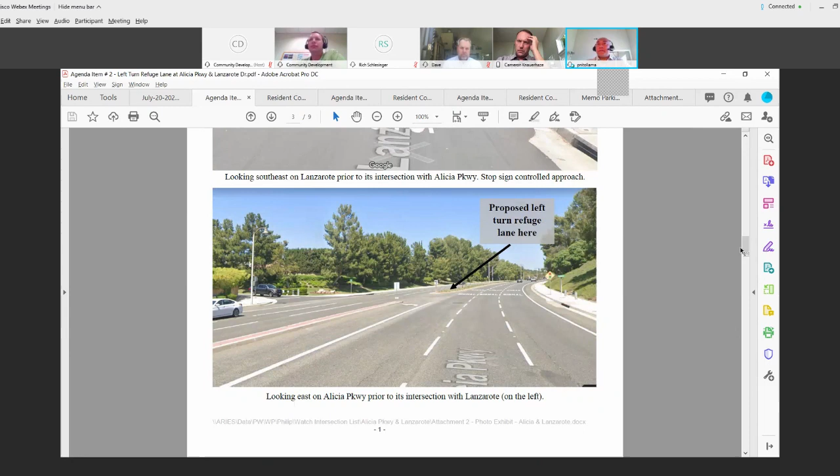And then this picture here is if you're traveling westbound on Alicia Parkway, you have Lanzarote to your right, and then the raised median is on your left where the proposed left turn refuge lane is supposed to be constructed. This picture is just a location of what's out there today. There is a raised curb median, some landscaping and some trees, and I believe there's a drain inlet at the nose with some signage.

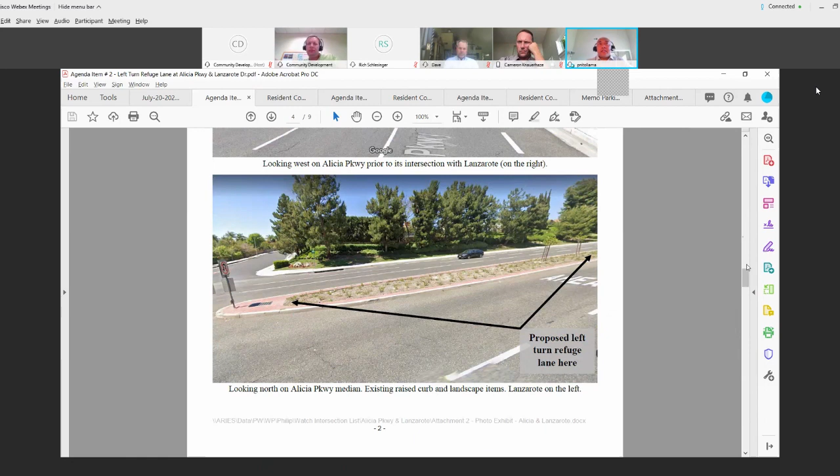This exhibit shows the intersection sight distance visibility based on our standard plan 315. You're supposed to be able to see 660 feet in each direction when exiting out of Lanzarote. There is a slight horizontal curve that's in favor of the sight distance, so you're on the outside of this curve, which increases your visibility.

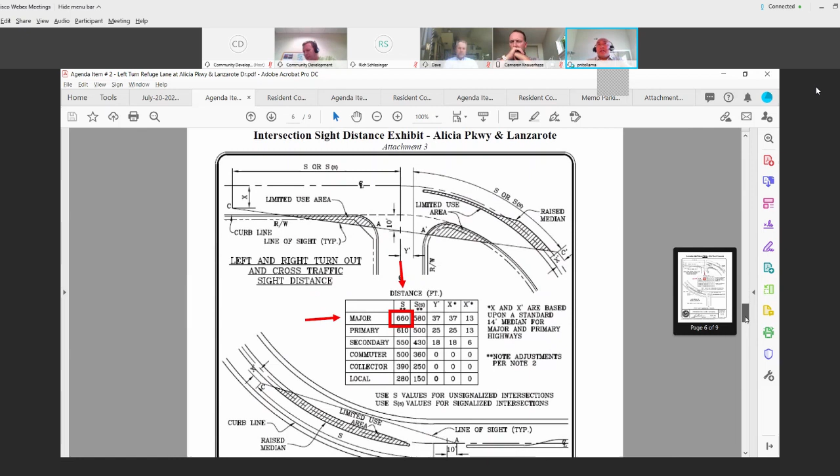And then this is our standard plan. Alicia Parkway is a major roadway and it's an unsignalized intersection, so that's how we came up with 660 feet.

And this is the original request that we received from the resident. I'm going to read this out loud.

Good afternoon, Mark. Here's a preliminary design sketch as to how to improve traffic flows across Alicia Parkway from Lanzarote to the eastbound lane of Alicia Parkway. You and I have discussed this possibility many times over the past few years, and I thought I am now going to do something about it.

We need action, and I speak on behalf of many Andalusian residents. The city opined in Brett Kennedy's recent letter that there is no significant reason to do anything. He obviously does not recognize the traffic problems getting across Alicia's westbound lanes. Mark, I urge you and respectfully ask you to get this work designed and done.

I am writing this and submitting my preliminary sketch to you and asking you to give this matter priority. When the swimming stadium needed to be renovated, no money nor effort was too much. However, when one looks at the overall impact of it, one asks who's actually benefits from that $11 million. Anyway, enough said. So please let's see some action very soon. Hope all is well with you. Sincerely, Jeff.

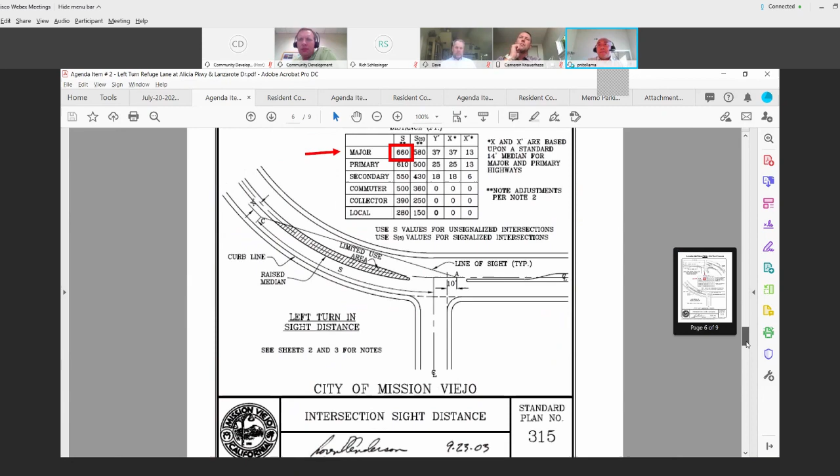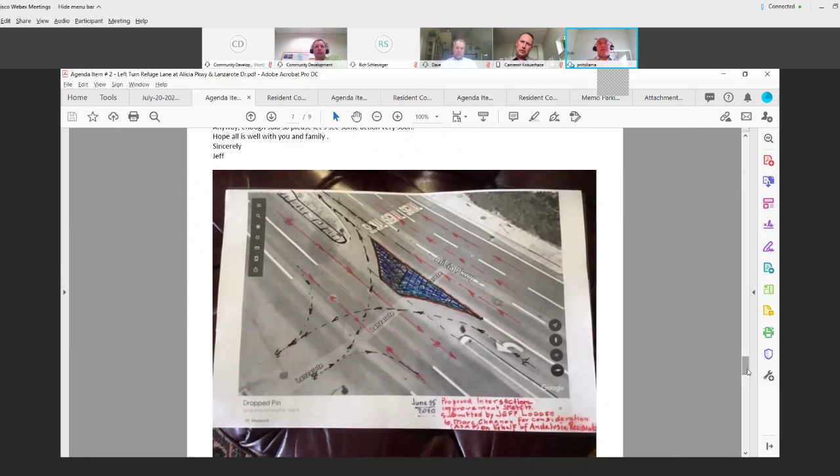Can you guys see this exhibit right here? Okay, I just want to make sure that this is very clear what's being asked. There's supposed to be an eastbound refuge lane, and then there's also a guiding island in the middle - a triangular raised island at the middle of the intersection.

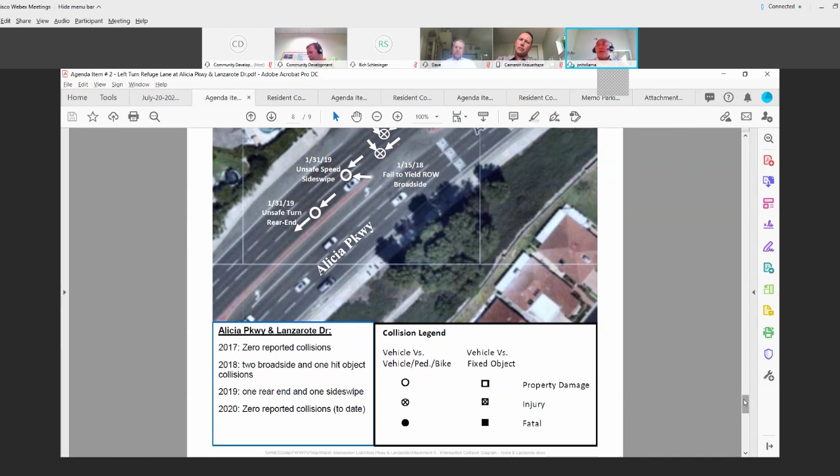We typically review collisions for 3 years, so 2017 is as far back as we review. But in 2016, there was a fatal collision at this intersection - another broadside. The cause for that one was based on driving under the influence, as the driver was under the influence. That's outside of the 2017 3-year mark, but I want to make a note of that.

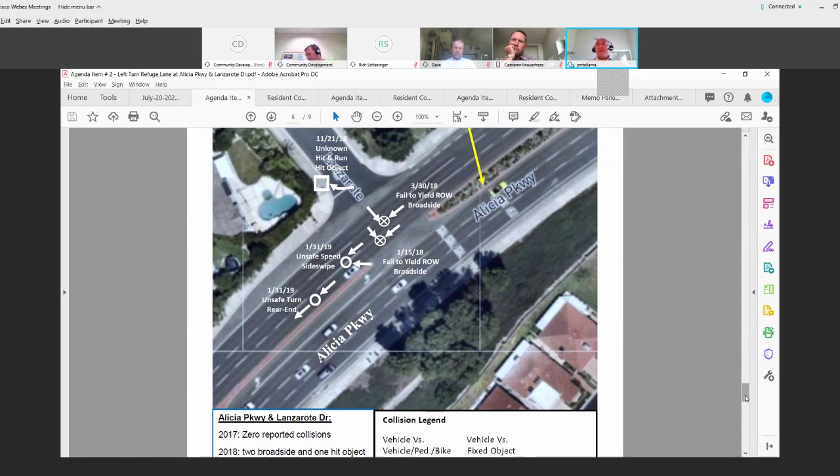Option 1 is to keep the intersection as it is. Option 2 is spot police enforcement and temporary speed radar trailer placement.

Option 5 is to construct a no left turn signage and striping and eliminate the left turn on Lanzarote. That would make the drivers make a right turn instead, and then they would have to make a U-turn at the next signal, which is Calle Azarin.

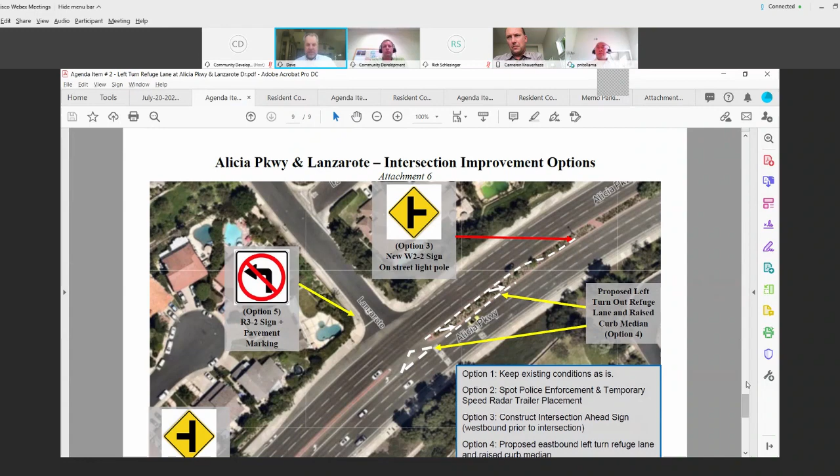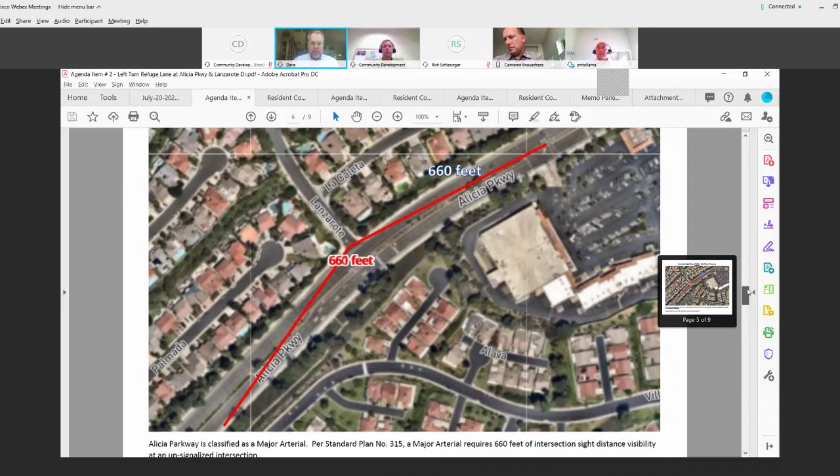All right, I have the perfect solution. Okay, if you can go back a couple pictures, because there's one that's just so perfect. It tells you how crazy this intersection is. I'm very familiar with this intersection. Keep going, one more, I think. It really gives you a feel. One more picture. All right, I guess that's good. That's a good one right there.

So that's Lanzarote, people are coming out. The red car is about to try and get across to go eastbound on Alicia, I suppose, where that is. I've done that, I've been right there, and I know all of you have too. You've got 3 lanes of traffic and a bike lane coming at you, and you have to time it so you don't get hit by anybody coming down eastbound Alicia. It's not safe. I'm glad you mentioned the fatality that was there not long ago, a couple of years back.

And it seems like all the accidents—this is where you guys decide this part—but it doesn't seem like that refuge lane would solve the problem. Almost all the accidents have been T-boned, from someone coming down here, from a guy trying to get across over to that. So I don't see how having that turnout lane, or whatever we call it, the refuge lane, is going to solve the accident. The accidents have happened before they ever get over to that. So it doesn't seem like that's the solution.

Now go back, can you go back to the last one you just had? Before I ask you to go back all the way to the front.

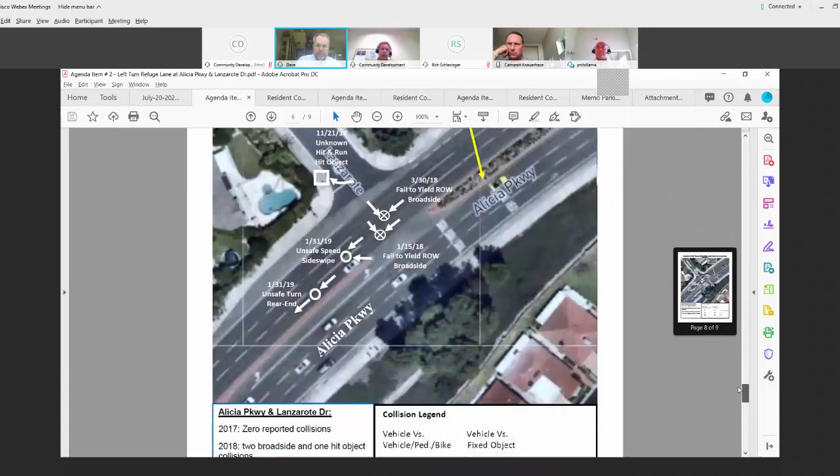Oh, that one there too, with that whole cutout thing. You can see it here too, the little white triangle or whatever. It seems like that might even be dangerous for traffic going eastbound on Alicia, and you've got that cement raised area there, I think that's raised. I don't know what that turnout lane is composed of, but it seems like that may not be the best idea. But here's your solution, and you guys just got to figure out how to do it.

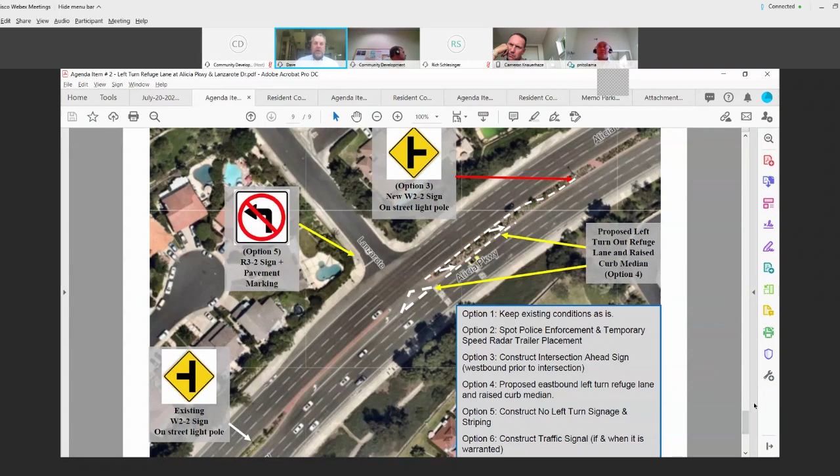I've seen them, they're like a yellow traffic light. It's not a traffic light, but it's just a yellow flashing. It just sends a message, hey, look out here, maybe slow down a little bit, something's coming up. Where there's no traffic, you don't have to stop. It doesn't screw up the synchronization, but it just allows the residents to know that this is something you should keep an eye out for.

In the event that you cannot do that, I think the traffic light is the best. It seems like this place would really warrant a traffic light. However, if it doesn't have all the criteria that allows us to have the traffic light, and you think this cutout refuge lane would work, then I would support that. Thank you.

Okay, thank you for your comments, Commissioner Leckness. I think you're referring to a beacon, the flashing beacon.

That's just a light that's constantly flashing. We do have a couple of those in the city. There's one on Trabuco, just prior to Modesto, and then we also have one on El Toro, just before Glen Ranch Road. The flashing beacons, that's what they're called, are placed there because they warn the driver that you may have to stop, there's a signal ahead. That's what the flashing beacon informs the driver. For this particular intersection, it is unsignalized, and they wouldn't be stopping because they don't have a traffic control. So I'm not sure if that's an applicable solution for this intersection.

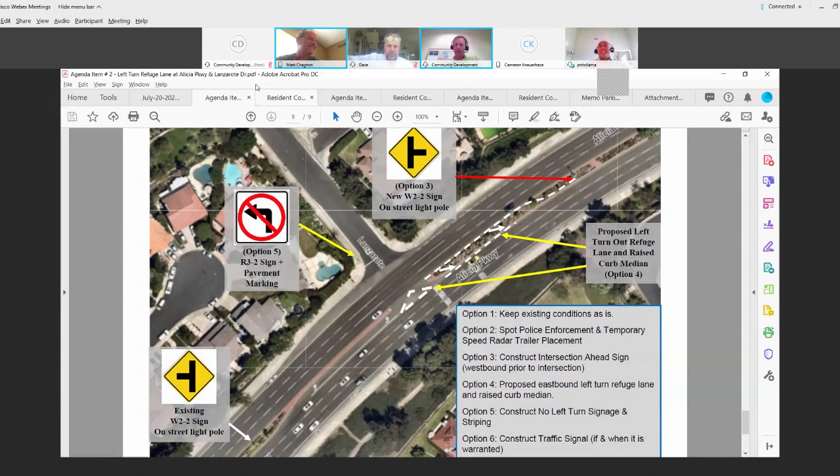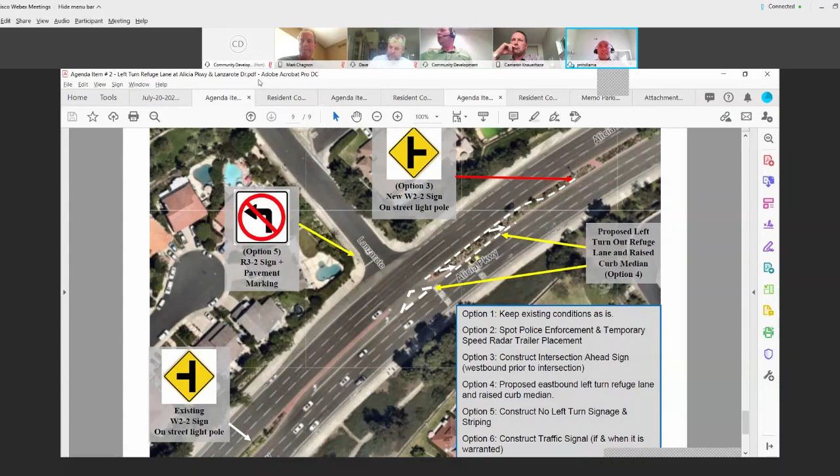All right, I think it's my turn to share now. Oh, this is our stop signs on Country Club Drive. Let's see here, I need to share my screen.

This item came to us at the request of one of our residents. This is a request for stop signs on Country Club Drive at Bodega Lane. This intersection is located off of Country Club Drive, just south of Oso Parkway. You can see I have it marked with the red dashed circle to indicate the intersection we're talking about. This intersection has an existing one-way stop on Bodega Lane exiting the Mission Ridge neighborhood. The request would be to add 2 additional stop signs and the associated pavement markings that would go with them.

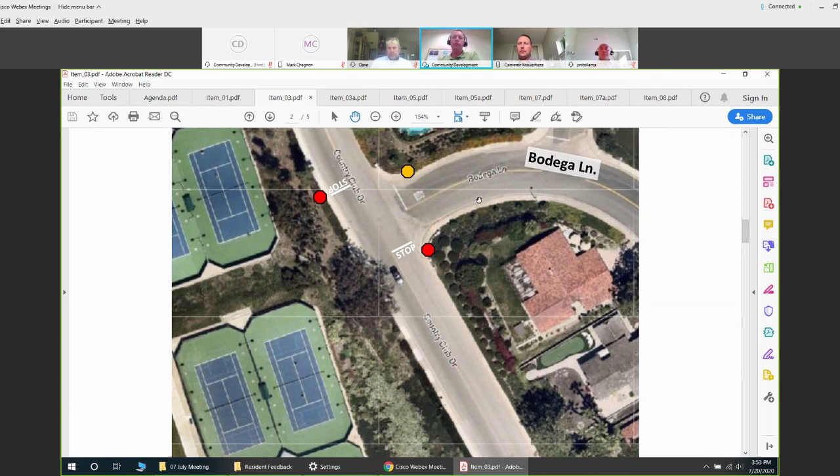We did receive one comment from the original requester that will go into further detail for the reasons for the request. So I'll just move ahead with our report on the intersection right now.

So we looked at the all-way stop sign warrants that are part of the California Manual on Uniform Traffic Control Devices, which has all the criteria we look for before putting out a stop sign. The first criterion, A, is we can put in an all-way stop when a traffic signal has been justified, usually as an interim measure between justifying the traffic signal and when it would be constructed. There are no plans to construct any traffic signals here, so that warrant is not met.

The second one, Warrant B, is when there are 5 or more left turn, right angle, or broadside collisions within a 12-month period. We looked back at the last 3 years of data, 2017, 2018, and 2019, and found there were no broadside type collisions at this intersection. Therefore, that warrant is not met.

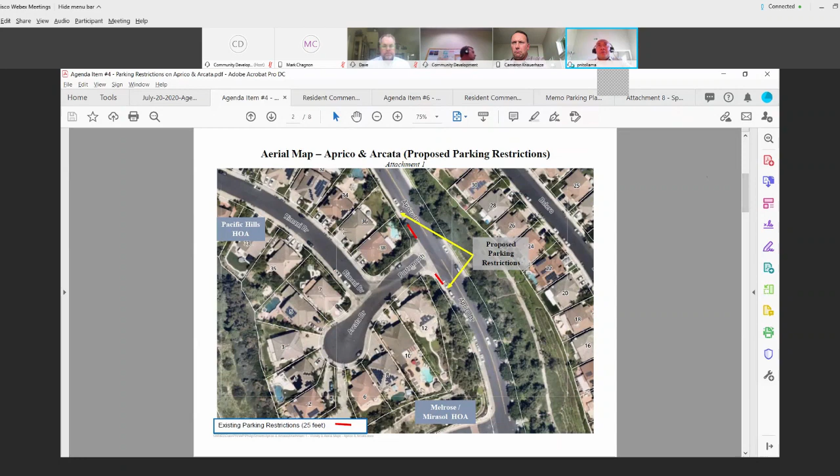What the resident is asking for is to go above the 25 feet existing restrictions so that they could see better, with the sight distance when they're exiting out of Arcata Drive. On this exhibit, we do have Pacific Hills HOA when you enter Arcata Drive, and then to the south, when you get further down Aprico Drive, there's Barletta, which leads to the Melrose and Mirasol HOA.

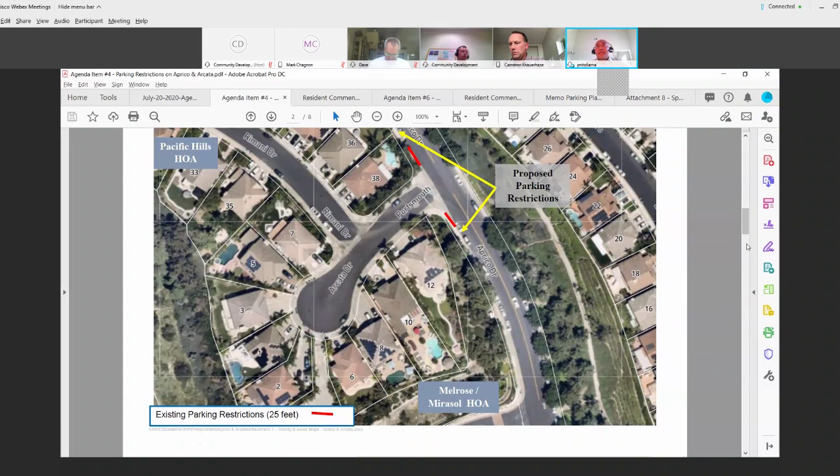This exhibit here is when you're traveling south on Aprico. As you can see, Arcata is on your right. This is if you're sitting, trying to make, to go out of Arcata. You could see the parking restriction on the right.

Today, there's a 25 foot parking restriction, with a sign here in the middle. What they're asking for is a greater parking restriction so that they could see better. Right now, there's not a car there, so the visibility is pretty good, but when there are vehicles there, they indicate that they're unable to see further down the street.

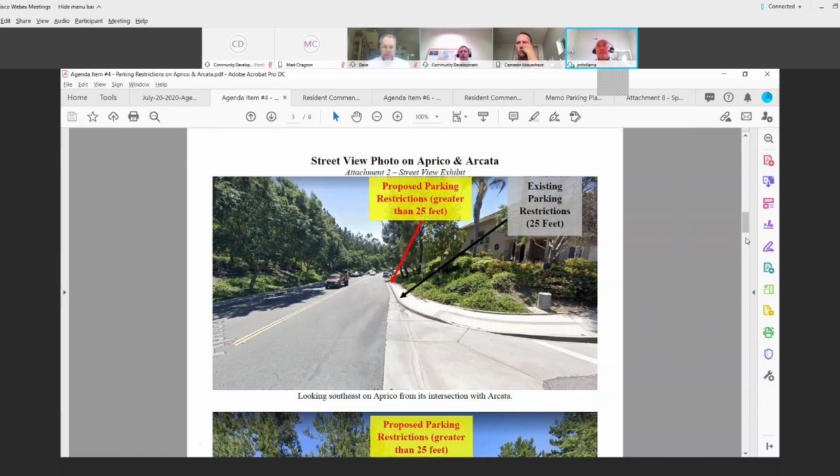And this street view photo is when you're looking in the opposite direction. Again, there's an existing parking restriction of 25 feet.

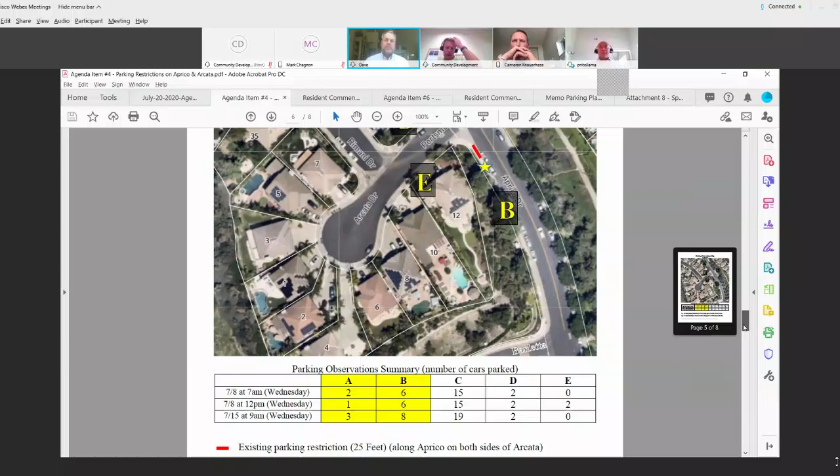I don't have a question, but I get the sense that the applicant just doesn't want parking on Aprico, and it's not a real safety issue. I know that area, I go down that street often, and there are cars parked along both sides, but it's needed because of everybody. Right now, especially like the one person who wrote the email said, with people being at home in the last few months, it probably is a little more crowded there because people are at home and they really can't go to work, or they are working from home. I thought that was a great point that she mentioned there. But

My feeling is, I don't know if this is a staff recommendation or what, but I feel it should be left as it is, and they just be careful coming out of there. It's a perfect street too, it's not a big traveled street. It's perfect for somebody to park cars on both sides. It is the ideal street to park cars on. There's no homes in front of anybody's home. It's just the perfect spot, I think, to have overflow parking. Thank you. All right, thanks.

I would only add to that. I agree with Dave. There's a real overtone of this being a community policing problem. I would highly recommend that your reporting party call the sheriff's department, have those vehicles that are marked, get them marked if they're there past 72 hours, have extra patrol checks. But the safety aspect wasn't really articulated. What was articulated is that this was a community policing problem with the commercial vehicles, the RVs, drug activity, littering, and everything else. So I would say leave it the way it is, but blow up the phone over the sheriff's department and get some extra patrol checks over there and see if that helps at all. That's all I have.

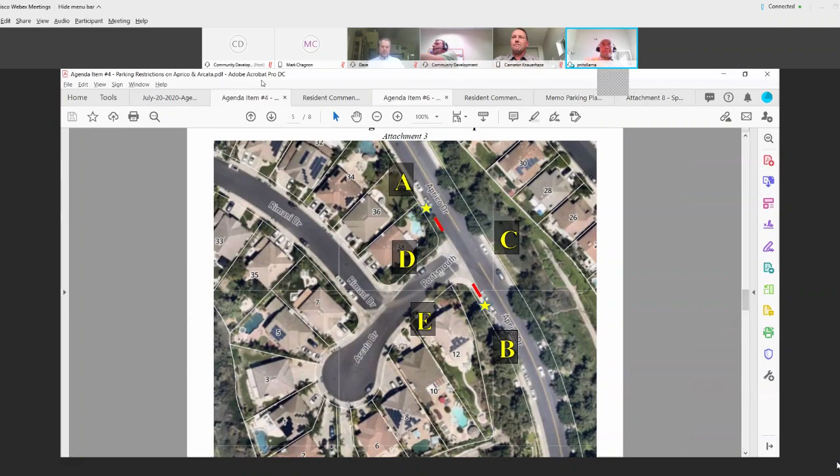Hey guys, so stop me if you've heard this before because we're going to be back on Bodega Lane here. All right, so let's get back on this and then.

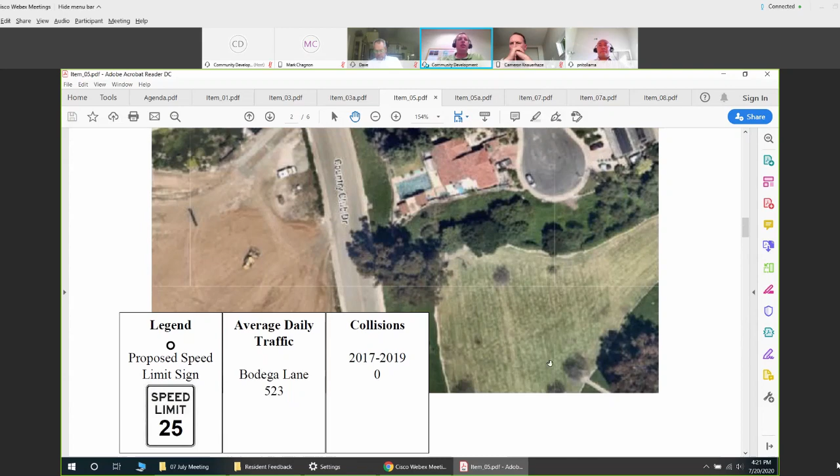So we looked at the collision history out here again, as we do whenever we have a traffic committee item on a street. From 2017 to 2019, there were no reported collisions on the street. Also, just for reference, I did look up the average daily traffic on Bodega Lane, that was some information we had collected for the stop sign item. On an average day, we have about 523 vehicles on Bodega Lane. Also, there's the legend showing what the requested speed limit sign would look like.

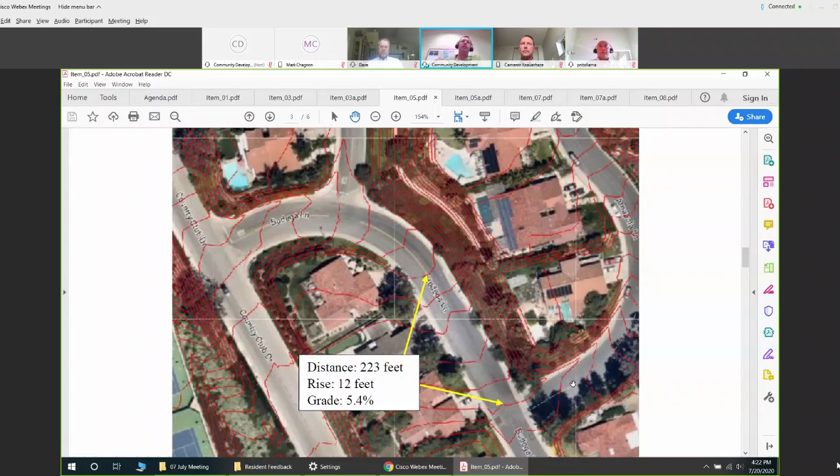One of the items of concern was the grade or steepness of the street as it descends down towards Country Club Drive. It's rated at about a 5.4% grade, so it's getting a little bit up there in how steep it is. As we talk about speed humps in the traffic committee so often, 5% is the cutoff above which we can't consider speed humps on the street. So that's just a reference for how steep the street is.

The California Vehicle Code is going to play a role in our decision making today, because typically with residential streets we have what's called a prima facie speed limit, where the street is considered a residence district, and by default the speed limit is 25 miles an hour. That's what this section, 22352, basically says: in a residence district, the speed limit shall be 25 miles an hour.

Below that, I have section 515 which defines what a residence district is. It looks for a roadway that's a quarter mile in length and has 13 or more dwelling units on one side of the street, or if it's double loaded, 16 or more dwelling units. So the length of Bodega Lane — here's our data.

It's about 600 feet long, which is short of the requirement in the California Vehicle Code. Also, for the number of homes, I was conservative and only looked at the 13 required for a single loaded street, since for the most part Bodega Lane is a single loaded street. We would need 13 homes, and there are only 7 total on Bodega Lane.

So that doesn't mean we can't do a speed limit sign. It means that just putting up a 25 mile an hour speed limit sign doesn't make it enforceable. What we'd have to do is include Bodega Lane in our next speed survey, coming up in 2022, and conduct a speed survey to justify a posted speed limit on that roadway to make it enforceable.

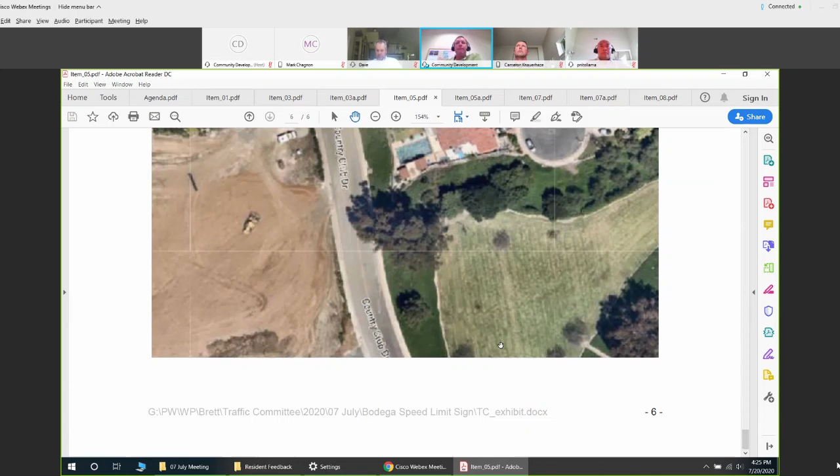And so that concludes my report on the request for speed limit signs on Bodega Lane. Do we have any questions from the commissioners, or shall I move on to our resident comment?

All right, so our comment is — oh wait, you know what, I have an exhibit for this. Here we go.

So the need for posting a speed limit sign when entering Bodega Lane is based on my observation of motorists driving at excessive speed in this residential area. The potential for vehicular accident and injury, especially for children, is present. Your action on this matter will help address or minimize this risk. This is from Donna Villanueva, who is the originator of the request.

So, at that, I can open it up to commissioner comments.

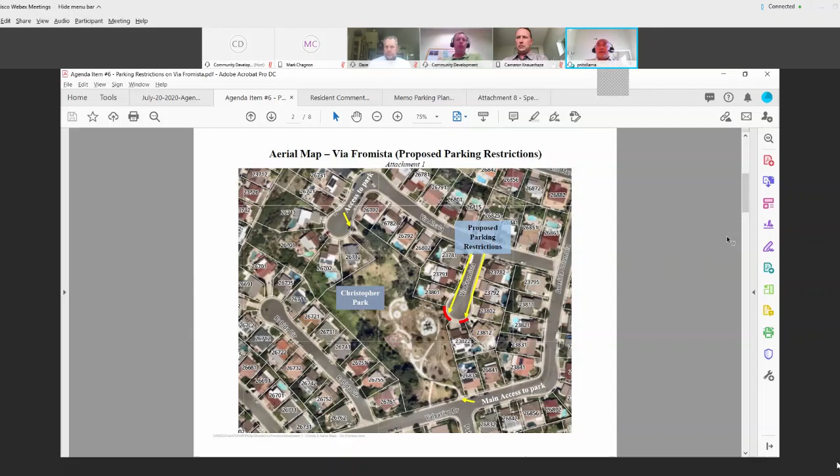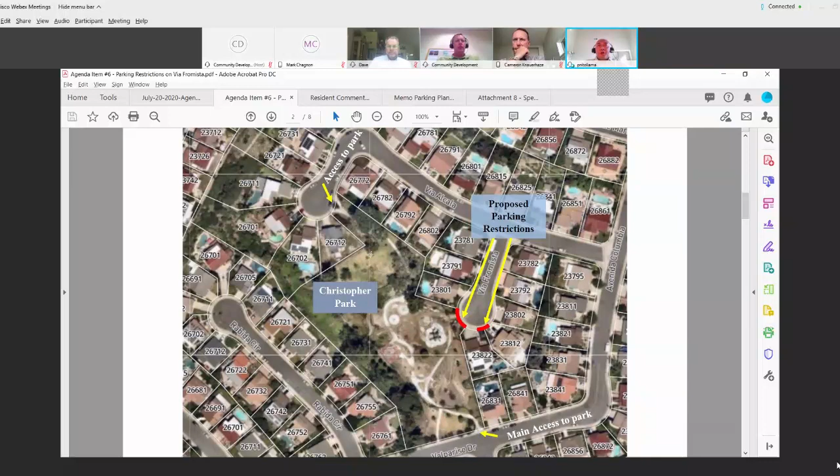We don't have any traffic volumes for this street, and there were also zero reported collisions in the past 3 years. So this is—let me try to make this bigger. Okay, there we go. So this is our aerial exhibit. This is Christopher Park, and we recently made some renovations on this park.

This park has 3 access points. One is on the top left via Alcala, and then there's another access point here on Via Fromista. On this cul-de-sac is where the proposed parking restrictions are being requested. There's 2 locations for parking restrictions. And then at the bottom of the exhibit, I don't know if you guys could see that, but there's also another access point to the park off of Valparaiso Drive.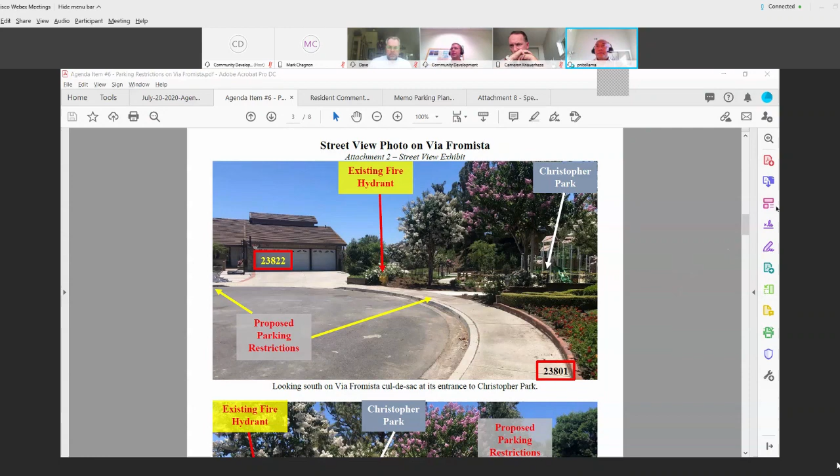Traditionally, the city has moved away from painting red curbs due to maintenance issues. We have been utilizing signage instead of red curb, so I just want to point that out very clearly. And this is another view of the area, just from the opposite end of the cul-de-sac. Again, there's a fire hydrant. The parking restriction would go right here, right in front of the entrance to the park. It is enforceable today because of the fire hydrant, but they do want red curb or signage or both.

And then this is a picture when I'm actually inside the park and I'm looking out. There's a fire hydrant right here. The resident that's asking for the restrictions is just to the right of the fire hydrant. And then just past the resident's driveway, there's a white car parked there. That white car is also the second area where they're asking for a parking restriction. All right, and then this is a photo that I took on June 9th—I was there in the morning.

This photo came from the resident. They said there was a construction vehicle parked right in front of the fire hydrant. This is actually the landscaper doing construction for the park - you can see the landscape and trees are different. So this is a city hired vehicle from when they were under construction. You can see the green fence is still up, and they have the ditch digger there.

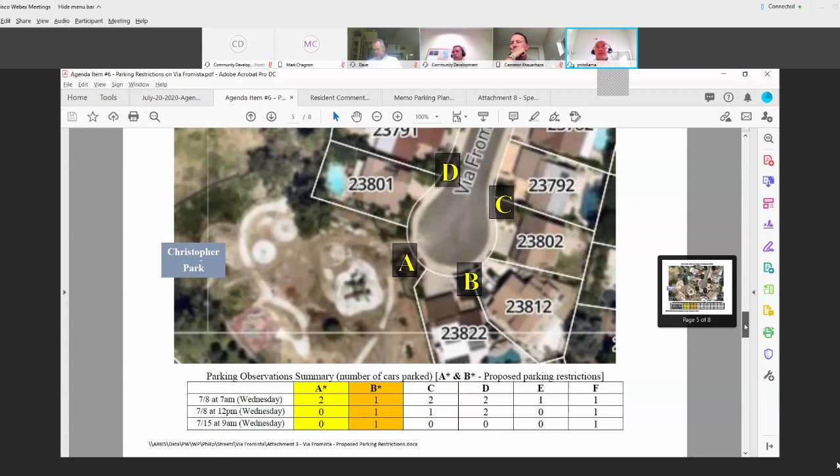Sections C, D, E, and F had a range of 0 to 2 cars at different times of the day on 2 different dates of the week. And this is the original letter we received from the resident at 23822, which was sent to our Public Works Department.

Good morning, Jerry. Thank you for taking the time to discuss the Christopher Park renovations with me last week. It is truly appreciated. Regarding the parking situation in Via Fromista, I believe that the Via Fromista entry to the park will be seen as and used as the main entrance to the park, and that this is going to affect our use of our own personal property and will negatively impact the quiet cul-de-sac experience we bought this house for. The use of the Via Fromista entrance as the main entrance to the park is evidenced by the construction crews on a daily basis.

For the same reason the construction crews are using Via Fromista each day as their main entrance, so too will park users, as the entrance is now the closest to the play equipment as well as the new picnic equipment. I just cannot see someone parking anywhere else, especially if they want to bring picnic supplies with them. At a minimum, we would like to ask the curbs in front of the fire hydrant to be painted red to deter people from parking here. Even in the old state of the park, parking in front of the hydrant has been a constant issue.

If the small curb to the left of our property could as well be painted red, that would be ideal. We often have to avoid cars hanging out of our driveway as park visitors try to use this small curb for parking. Both of these issues will be more frequent with the park equipment and picnic facilities now oriented so close to the Via Fromista entrance. I have attached a picture of the hydrant area discussed above. Additionally, I have attached 2 pictures showing how much dirt and debris is left each day by the crews at the point they enter the park. The pipes laid down to allow water to pass the trucks up the curb are once again filled with sand and rocks and other debris. Thank you for your assistance in addressing these questions. John Human.

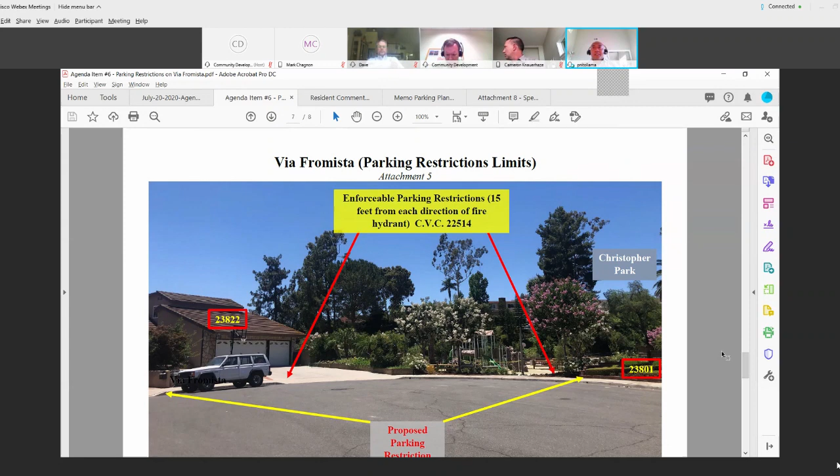Okay, so this is a picture when I'm standing in the middle of the cul-de-sac. This is the resident's original request at 23822, and this is the fire hydrant right at the middle of the picture.

I did show here that it is enforceable by our vehicle code that you cannot park in front of a fire hydrant within 15 feet in each direction. So here are those 15 feet limits. They are asking for parking restrictions for the entire curb here, and also on a curb to the left of their house where this white van or SUV is parked. This white SUV was there at all 3 times of my parking observations, so I just want to make a note of that.

And then this is my last exhibit. We have traditionally converted to no parking anytime signs in lieu of painting red curb due to maintenance issues. So I did show where the signs would be placed if we did approve it, or we could do the red curb paint, or we could do both.

And then this portion right here between the two houses is also part of the request to have parking restriction signs on both sides, or a red curb to indicate that no parking availability there. There's no fire hydrant here, and it's outside of the limits of the fire hydrant.

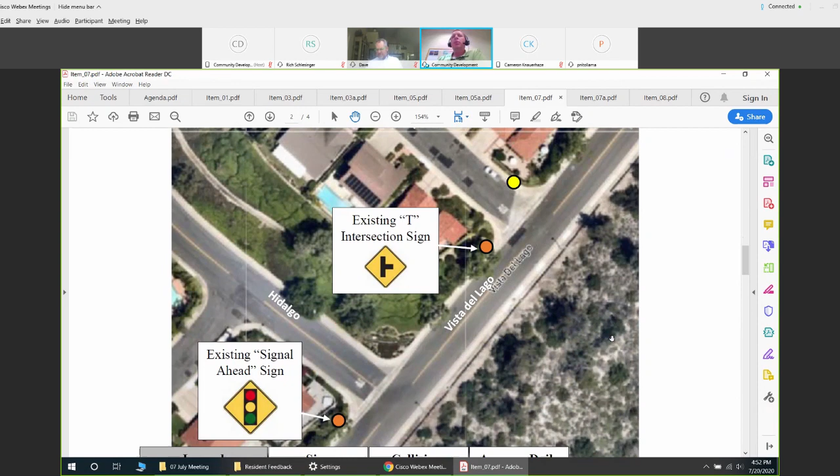Here's the exhibit showing the yellow dot where the requested no outlet sign would go, with a few other signs noted by orange dots. The first is an existing T intersection sign posted in advance of Hidalgo. Further down the hill, there's an existing signal ahead sign warning motorists of the traffic signal at Los Alisos Boulevard. Here's our legend showing the proposed no outlet sign and what it looks like.

At this intersection, for the last 3 years, from 2017 to 2019, we've had zero traffic collisions. Also, the average daily traffic of Vista del Lago is about 5,200 vehicles a day.

Here we have a couple of photos showing the intersection. There's the entrance to Abrazo from Vista del Lago, looking east, and then the same intersection from the west approach. Then this is on Abrazo looking out towards Vista del Lago, and this photo is looking into Abrazo from Vista del Lago.

I have one resident comment on this from the original requester. Let's see here. He says he'd like to submit the picture below for review: the through street sign is posted at the entrance of Abrazo, where I live, and not at Hidalgo, which it is intended for, and that's the root cause of confusion for drivers entering our street and speeding off once they realize it's not Hidalgo. The picture also shows a right turn arrow on Hidalgo Street, where the through street symbol sign should be moved to. In addition, our court needs a sign posted that it is not a through street.

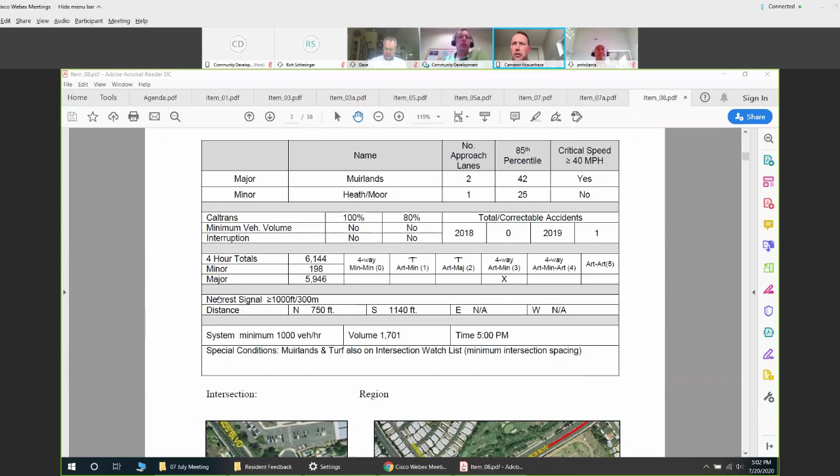You had a couple intersections with footnotes. What do those footnotes connect to? I think it was Poe and... there's one. Yeah, Alicia and Poe. There's a footnote.

The indications for the footnotes were left over from last year. It was because of the way the data was collected at those intersections—there was a little bit of an irregularity because they only collected data on one side of a 4-way intersection, so we had to estimate our traffic volumes based on having one side of the data versus both. But that was corrected in our data collection this year, so that footnote was no longer necessary.

Copy that, that's all I got. Okay, Commissioner Leckness, if there are no questions, then I will mark this as receive and file. Yeah, receive and file. Thank you.

On that, I can open it up for our updates. It sounds like Philip has some items to discuss with us, and then I have a few other little footnote items, and of course, if you guys have any other questions for us, feel free to ask. But I will turn it over to Philip to kick us off.

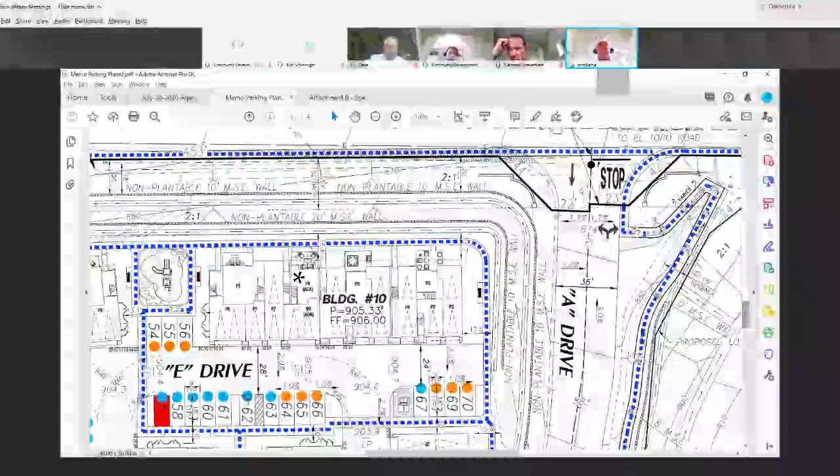So I'm going to now show the site plan. Let's see. All right, let me zoom out a little bit.

Okay, are you guys able to see the entire site plan? So on this site plan, the red parking spaces are the new spaces that were added. There's a total of 12 of them, and these are all guest parking spaces highlighted with a blue dot. This is the changes compared to last Monday's meeting.

We did circulate this plan to our staff internally. I know there were a couple of comments already. One was from our public services department. They indicated that parking space 21, next to the pool, they were looking to see if it would be better placed on the opposite side of the pool area, if it could fit.

And then our community development department indicated that parking space 45 in the middle, shows a row of about 15 parking spaces total. They think they need a landscape finger somewhere in there to break up that number of spaces. Our city code also says there's supposed to be a landscape finger, one for every 8 parking spaces. So that was the only comments that I saw.

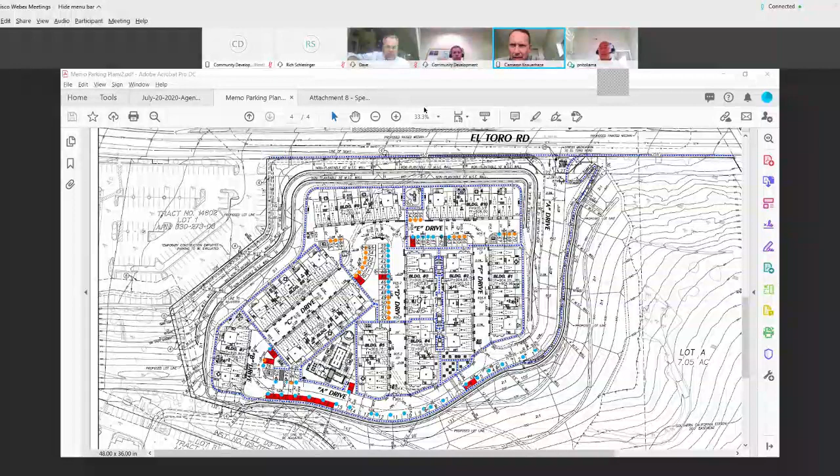And then just scroll down a little bit. There you go. Okay, so your staff was saying space number 21, they wanted to see it on the other side of the rec center. Did they give any rationale about that?

Did it have anything to do with it being butted up against that house? Yes, that's exactly the comment, was to move the parking space away from this home, maybe even add it next to 21 or 22 as another parking space if possible. They didn't want a parking space so close to the home, since this is the front portion of the home, just one parking space hanging out by itself.

I would agree with that. It's really close, and people coming and going and slamming car doors might be a little intrusive. If it can be fit over by 22, that would be an option, and if not, I would say eliminate it. Those are my only recommendations, the parking finger situation and trying to move spot 21 closer to 22.

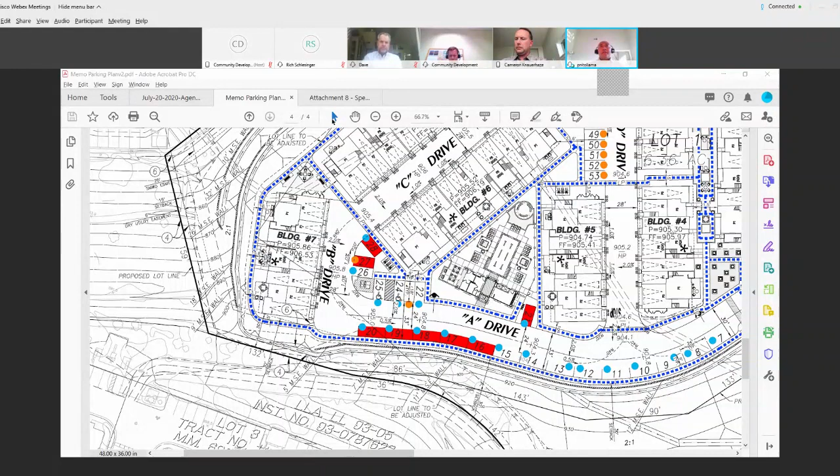I'll go ahead and move forward to our second update. This is just a follow-up that I wanted to show you guys what we've done so far. Back in January of this year, we went to the Planning Commission to approve some traffic calming on Via Fabricante and Obrero Drive. I don't know if you guys recall that. There was some angled parking installed last year and some pavement striping modifications. And then we went back to the Planning Commission for traffic calming reasons and an update.

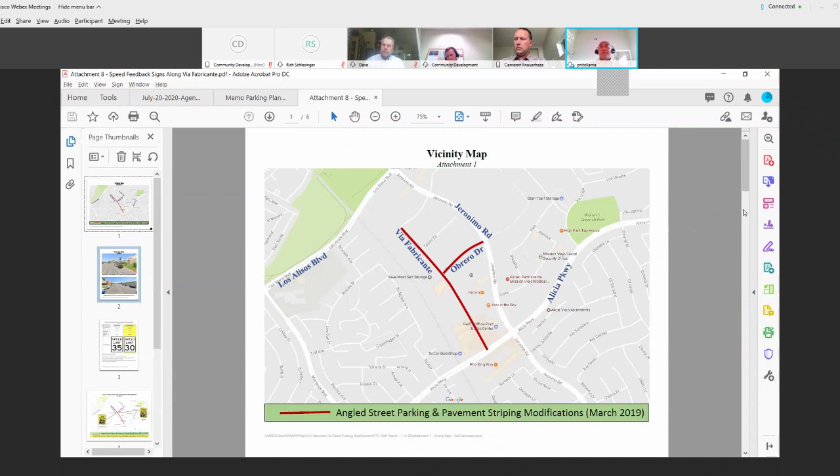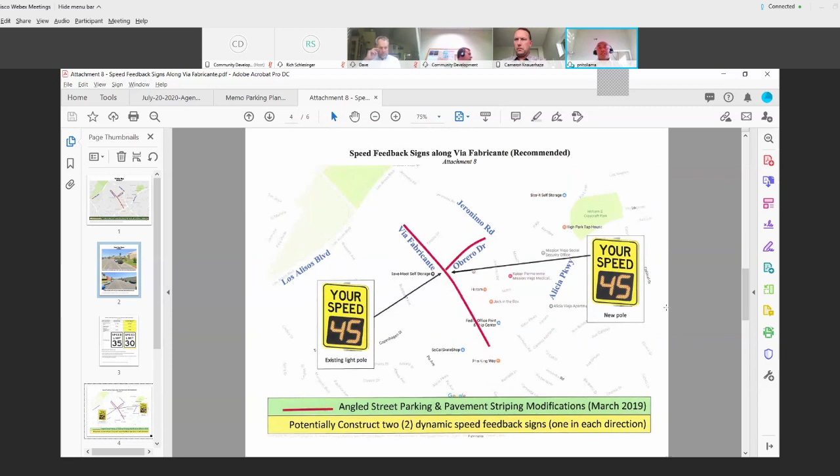In addition to that, one of the other things recommended for approval was to install 2 speed feedback signs on Via Fabricante and Obrero, one in each direction. That was back in January, and last week we did go ahead and install the speed feedback signs.

Very cool. Yep. So did you guys have any questions or comments at all for that?

I just got a comment. I think that sign's pretty cool, but doesn't it make you want to... because at night there's no parking on that street, right? Correct. I mean, it might be, if I was a kid, I would think it'd be kind of fun to get out there and just see how fast you could get that up to. Is that something that sign would do? Or, I mean, could that be a problem later? I mean, I suppose we could find out if it is, but to me that seems like it'd be a place to go.